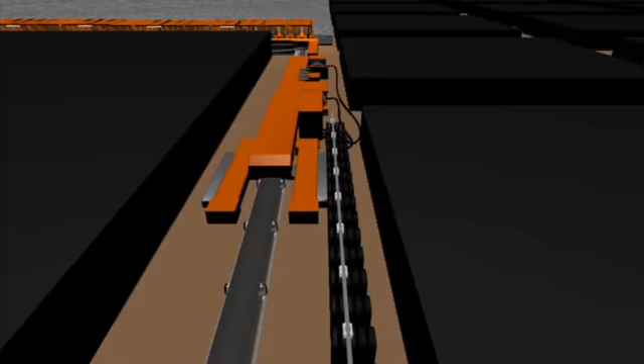At approximately 6:40 a.m. on April 5th, the day shift longwall crew arrived on the Headgate 1 North longwall section. They parked their rail-mounted man trip at the out-by end of the mule train and walked up the headgate entries to the face. They found that the third shift maintenance crew had left the shearer parked at about number 34 Shield.

The crew began producing coal and made their first call out at 7:30 a.m. The crew was responsible to call out their total shift production every 30 minutes. They also called out downtime and the location of the shearer. They reported the longwall was running and had mined .2 passes with no downtime. The shearer was at number 70 Shield mining toward the tailgate.

At 8 a.m., they reported .6 passes with no downtime. The shearer was at number 140 Shield mining toward the tailgate.

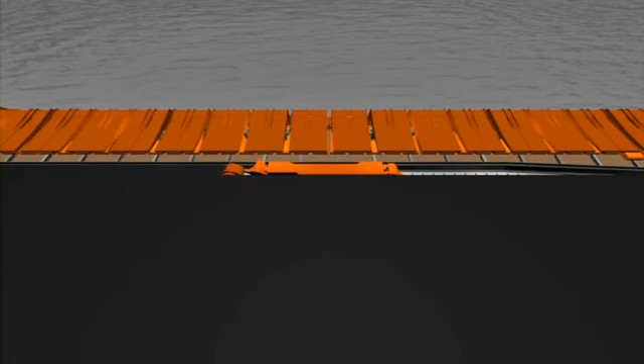At 8:30 a.m., the longwall reported .8 passes with no downtime, and that the shearer was on the tail in the shuffle process. The shuffle is the term used at this mine for the process of cutting back into the coal face on each end of the longwall.

At 9 a.m., the longwall reported one pass with no downtime, and that the shearer was at the number 155 Shield mining toward the headgate.

At 9:30 a.m., the longwall reported 1.4 passes with no downtime, and that the shearer was at number 65 Shield mining toward the headgate.

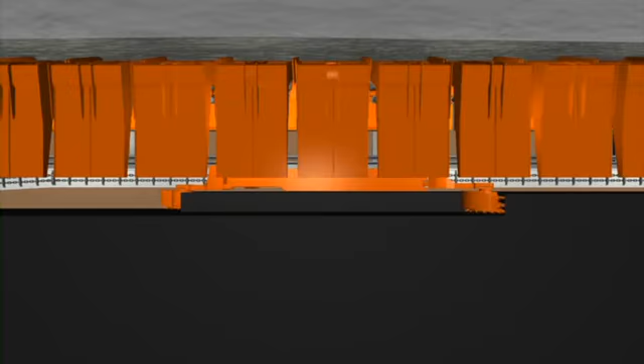At 10 a.m., the longwall reported 1.8 passes with no downtime, and that the shearer was on the headgate.

At 10:30 a.m., the longwall reported 2 passes with no downtime, and that the shearer was on the headgate getting ready to replace bits.

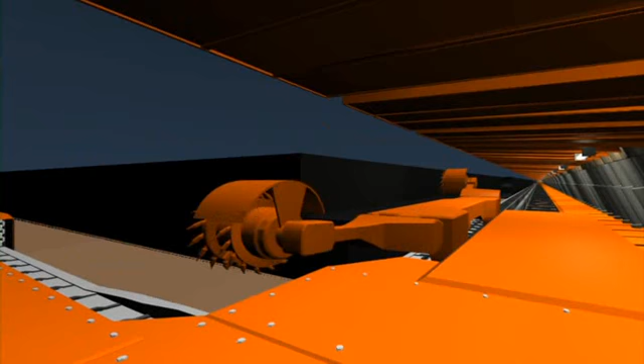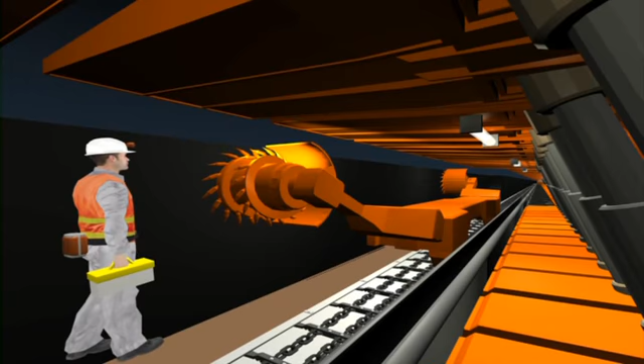MSHA believes that after cutting the shuffle, the crew parked the shearer to replace bits. While setting bits, the longwall crew discovered a B-lock, a part of a pin that connects the ranging arm to the shearer, was missing.

At 11 a.m., the longwall reported that 25 bits were set in the shearer and that the shearer was down due to a lost B-lock on the tail ranging arm. The crew estimated that they would be down until approximately noon.

At 1:30 p.m., they reported that the B-lock was in and they were tightening the bolts. They estimated they would be running at 1:45 p.m.

Between 1:30 and 2 p.m., the longwall started running. The 2 p.m. report shows 2.2 passes of production for the shift, indicating they had loaded 0.2 passes between 1:30 and 2 p.m. The report also showed 10 minutes of downtime in this period checking the B-lock. The shearer was at number 65 shield, mining toward the tailgate.

The 2:30 p.m. report showed 2.4 passes, 2 minutes downtime checking the B-lock, and that the shearer was at number 115 shield, mining toward the tailgate.

The pre-shift examination record shows that the longwall foreman called out the results of his pre-shift exam at 2:40 p.m. to the oncoming longwall foreman. This is the last known communication from the longwall to the surface.

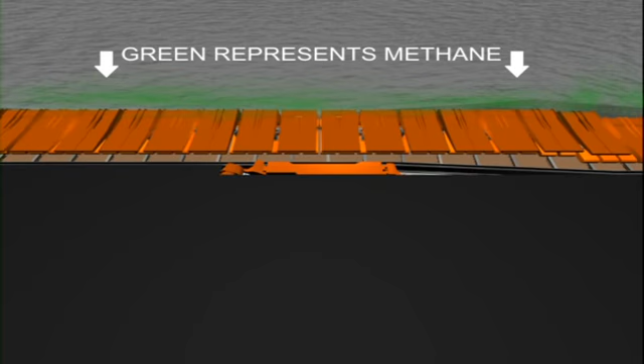During the investigation of the longwall, methane was found to be emanating from the mine floor near the back of several shields near the tailgate end of the longwall face. Investigators believe the methane migrated from behind the longwall shields. The methane encountered an ignition source, likely hot streaks, left by 2 dull, worn shearer bits cutting sandstone. Additionally, the water spray system was effectively absent because 7 water sprays were missing from the tailgate drum of the shearer.

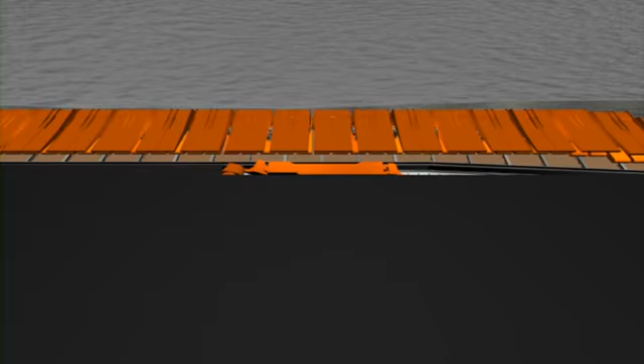MSHA believes that as the shearer cut into the tailgate entry, a methane ignition occurred and was seen by the shearer operators who shut off the shearer. The electronically recorded event log on the shearer indicated that the tail shearer operator shut off the shearer with his remote control just before 3 p.m.

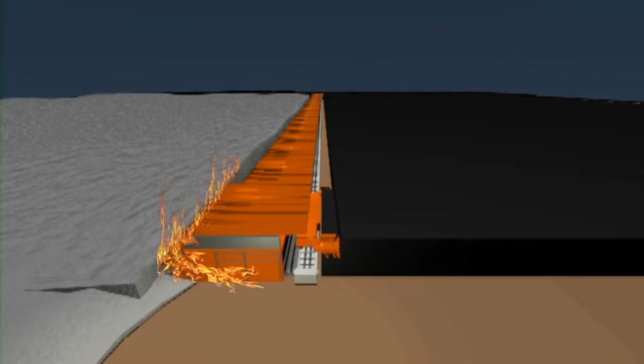The flame from this ignition continued burning behind the shields. Upon realizing that the ignition could not be controlled, the shearer operators, shield man, and longwall utility man evacuated toward the headgate. Investigators believe that these individuals shut off the face conveyor at the control box near the tail end of the face, called the headgate operator, and instructed him to de-energize the shearer.

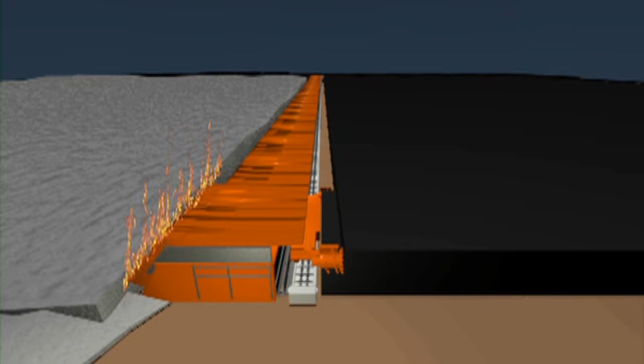The headgate operator opened the visible disconnect for the shearer cable and also shut off the water to the shearer. During this time, flame from the methane ignition continued burning in the gob behind the shields, and those miners continued their evacuation. At about 3:02 p.m., the flames encountered an explosive mixture of methane in the tailgate entry, causing an explosion. This methane explosion involved about 3,000 cubic feet of methane air mixture. The flame from this methane explosion created enough heat and energy to suspend and ignite coal dust from the mine roof, ribs, and floor, resulting in a massive coal dust explosion.

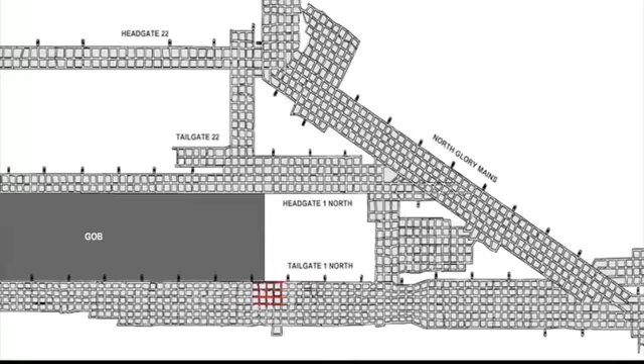Flame from the methane explosion would have traveled about 140 feet before all the available explosive methane was consumed. The methane explosion propagated away from the longwall face. With a flame speed of approximately 300 feet per second, the methane explosion would have extinguished in about half a second while generating a maximum pressure of about 4 pounds per square inch of pressure.

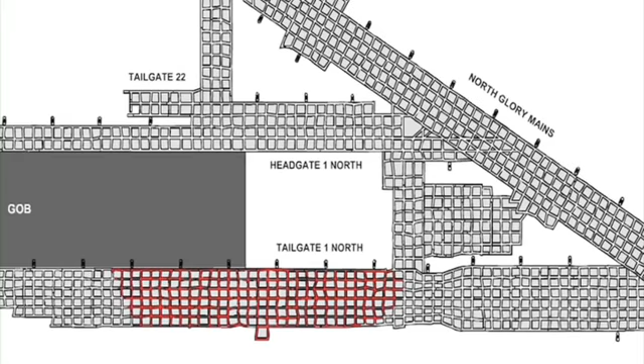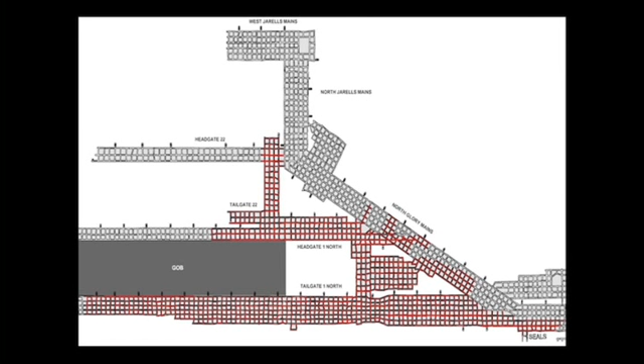However, significant quantities of coal dust were suspended and ignited during the methane explosion. The ignition of coal dust allowed the explosion to eventually propagate throughout all the underground areas affected by the explosion flame. Explosion forces were generated by the flame in all directions, including back across the longwall face. Evidence indicates that approximately 14 pounds per square inch of pressure traveled back to the longwall tailgate from the coal dust explosion.

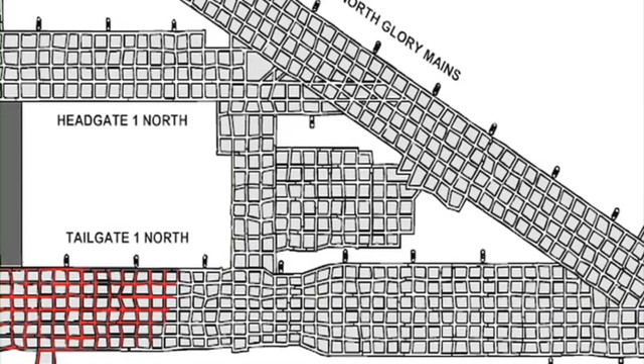Evidence also indicates that the flame from the coal dust explosion traveled in the tailgate entries at about 1,000 feet per second, while generating a pressure exceeding 18 pounds per square inch. At the same time, flame was initially traveling out in the tailgate entries at about 600 feet per second, generating about 6 pounds per square inch of pressure.

Several hundred feet before reaching the crossover entries, additional coal dust became involved in the flame, and speeds accelerated to over 1,000 feet per second in all tailgate entries. The flame speed dropped dramatically in the area where the tailgate entries intersect the North Glory mains, and eventually extinguished about 11 crosscuts out by the tailgate entries.

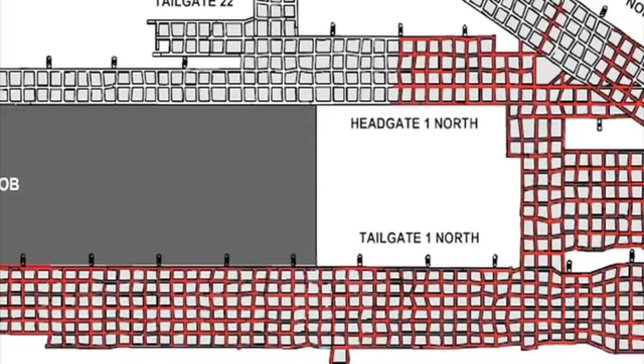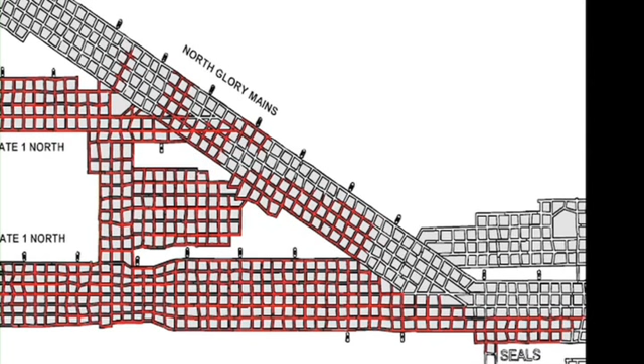In the crossover entries, the flame slowed but continued to travel toward the headgate entries of the active longwall, known as Headgate 1 North. Flame propagation did not occur along the length of the North Glory mains, but small pockets of flame extinguished as they projected a short distance into the entries of the North Glory mains.

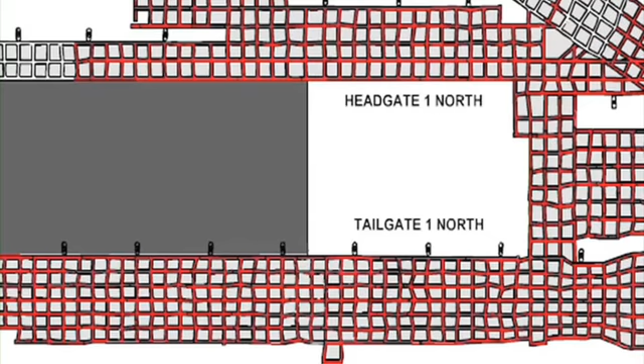As the flame entered Headgate 1 North, the destructive pressures propagated in-by, with a flame speed of about 1,200 feet per second, generating over 20 pounds per square inch of explosion pressure, as indicated by the damage to several monorail sections carrying the longwall cables. Although flame did not enter the longwall face, pressures ranging from 7 to 14 pounds per square inch did enter the longwall face from the headgate.

Flame and forces did continue in-by in the Headgate 1 North entries and into the Tailgate 22 entries. As the coal dust explosion propagated into Tailgate 22, explosion pressures increased to near 20 pounds per square inch due to pressure piling at the faces.

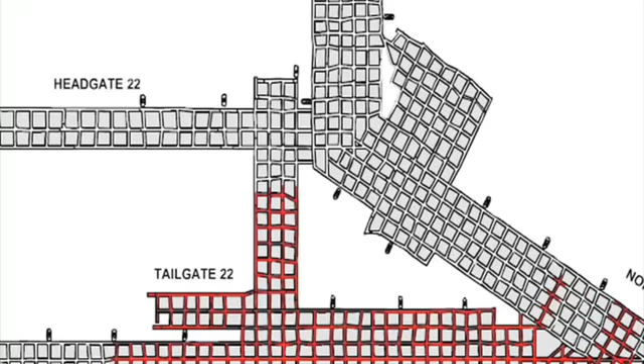The explosion flame turned into the crossover entries and headed toward Headgate 22. The flame propagated into Headgate 22 at speeds approaching 1,500 feet per second, generating a pressure of approximately 25 pounds per square inch. Additional coal dust caused increases in the flame speed and pressure as the flame propagated in-by Headgate 22. Calculations have shown that explosion pressures were on the order of 52 to 65 pounds per square inch.

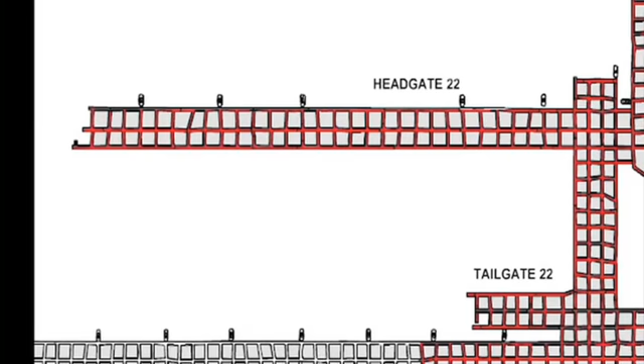Pressure piling occurred as the flame tried to continue in-by against the faces. This resulted in a reflected overpressure traveling out-by that could have reached a maximum of 105 pounds per square inch.

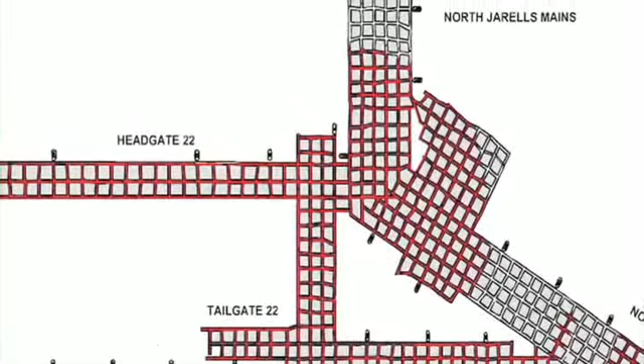As the flame traveled into Headgate 22, it also propagated into all entries and crosscuts of Jarells Mains and West Jarells Mains. Pressures throughout these two areas averaged about 20 pounds per square inch due to flame speeds of over 1,000 feet per second. The flame of the explosion extinguished at the dead end in West Jarells Mains due to a lack of sufficient oxygen for continued propagation.